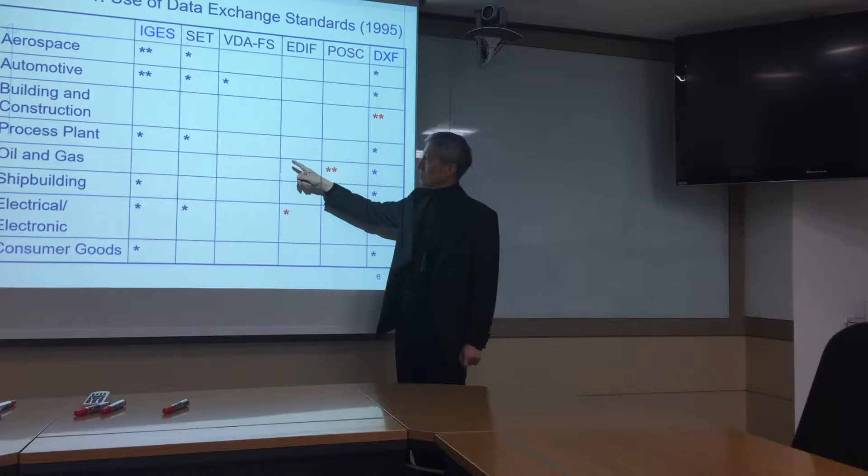EDIF is for electronics circuit drawings, and POSC was for plant industry, chemical process industry. You can see that DXF was good in building and construction industry at the time. POSC is good for oil and gas industry, as you'd expect. EDIF is for electrical and electronic industry. IGES is better for aerospace and automotive industry inside the United States.

Probably VDA-FS is from Germany, and they are strong in automotive industry. They are trying to move into a STEP world from IGES. So in STEP, the possible application is divided into the timeline of product development: design, analysis of the product, and product data management, PDM, or nowadays we can see PLM instead of PDM. This is the old name of PLM, and manufacturing itself, or machining.

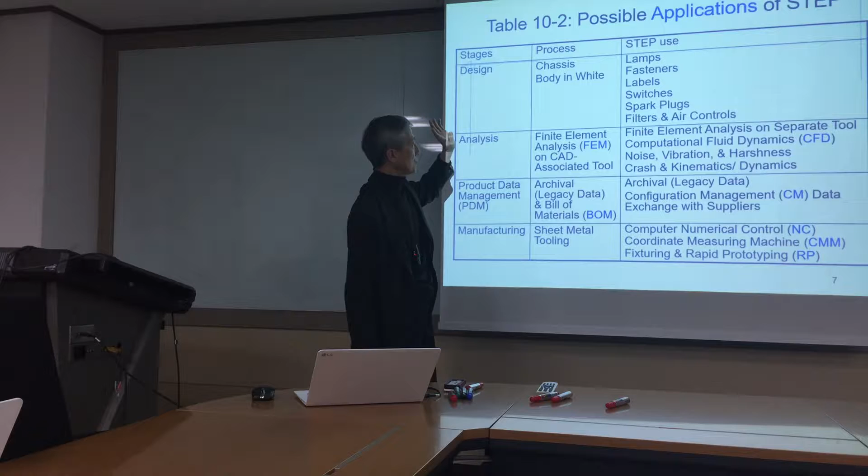If you think about more processes in design, you can see that this is for automotive industry. Chassis and body-in-white is probably for the body of the car, not the powertrain part or electronics part. Analysis may be finite element method or CFD and other things.

PDM is a database management system for engineering information, so you need archiving for long-term retention of data or legacy data, and bill of material, or BOM. Also you can think about configuration management or long-term data handling of design changes.

For 50 years of a nuclear power plant, you see that there are big changes. Say you think about your house, your home, for a long period of 10 years, things are changing inside your home. Many, especially the electric devices, are changing, and configuration also changes. So you need to manage the information changes of that product or plant, especially for safety devices of facilities such as nuclear power plants or aerospace, airplanes. It is very important to keep track of the most changes.

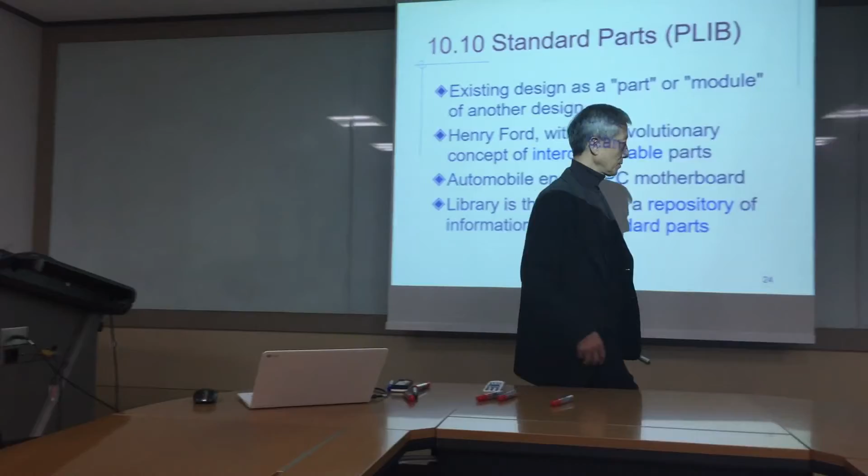Modules. So modular concept is used in many industries. Probably most of the industries are using a modular concept nowadays, including electronics too and plant industry too. Standard parts, it is also related with this component and parts, right? Rear parts, the electrical motors, and also bolts and nuts and pipe pieces and valves, pumps, right?

So existing designs regularly use many parts or modules managed by database technology. So Henry Ford, 100 years ago, used interchangeable parts of mechanical components of cars so they could make mass production, because the parts are coming from different small companies. The same bolt is designed by Ford but manufactured by other companies.

Nowadays, the same car, Volkswagen Golf, is produced inside China, inside Germany, inside Brazil too, right? The same car is produced, so interchangeable parts are manufactured and used by different portions of the company. Engine, motherboard. So we call this something like a library or catalog or database or repository, standard part or standard modules or standard components.

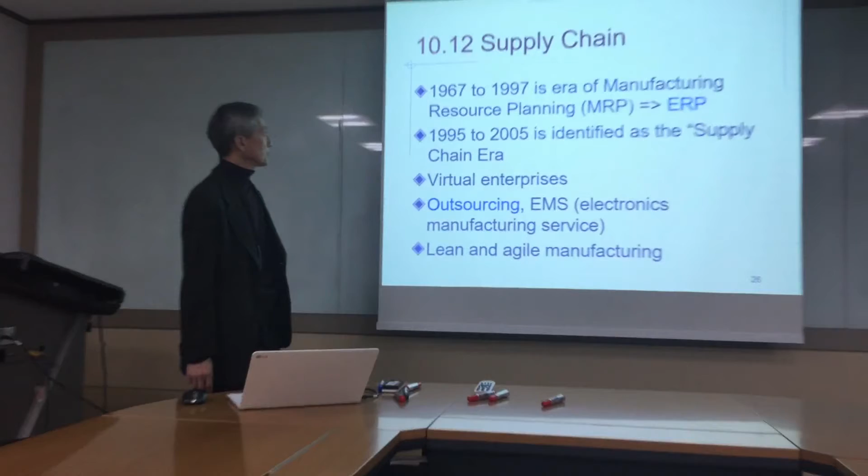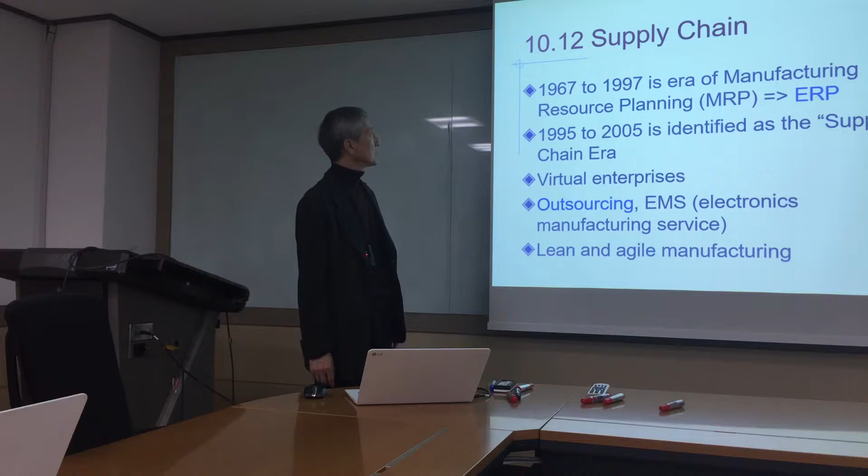Right? And supply chain was very important at that time, 10 years ago, because of outsourcing. And EMS was a popular name for outsourcing. And they were trying to do lean and agile manufacturing. Do you know what lean and agile means? The meaning of agile? Did you learn this from Professor Teshik? He is also very interested in this topic, right?

Maybe. Maybe? No, lean manufacturing is about the concept to reduce waste. Reduce wasted time, improve the efficiency of the process. It's like a philosophy more than a technique. And agile manufacturing, maybe it's related to flexible manufacturing systems, but I'm not sure.

Right. Lean means the company itself can be smaller by using more outsourcing. So the factory itself, the Ford Rouge factory, at one time was a very big site with a very big number of employees at one site, right? Now they've reduced it to only a small assembly line, right? And the number of employees is very small, right? Still they're producing more cars. So the size of the company itself is reduced through lean manufacturing.

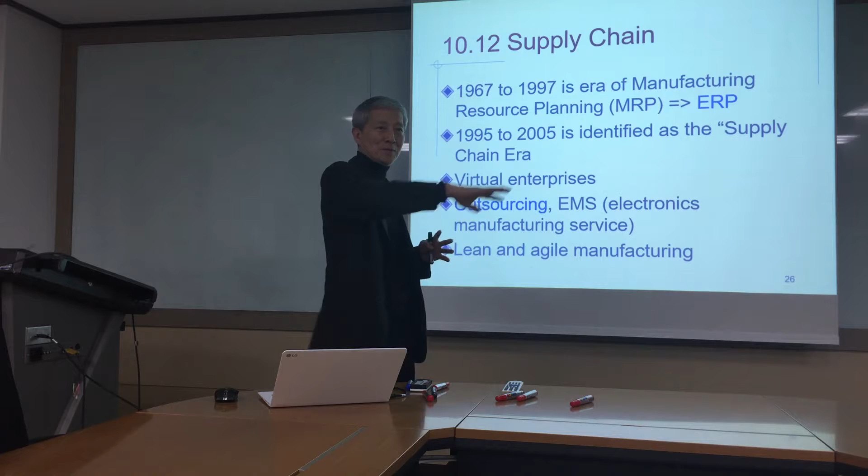So outsourcing is good for this. Outsourcing is good, right? That is another reason for outsourcing. If you want to change a Ford car model inside the Rouge factory, you should change a big amount of employment, a big amount of storage of material. But if you have only an assembly line, and the others are all outsourced, then you can change easily, right? Because you are handy size, right? Your body is very small. So because the outside world and market is changing rapidly, right?

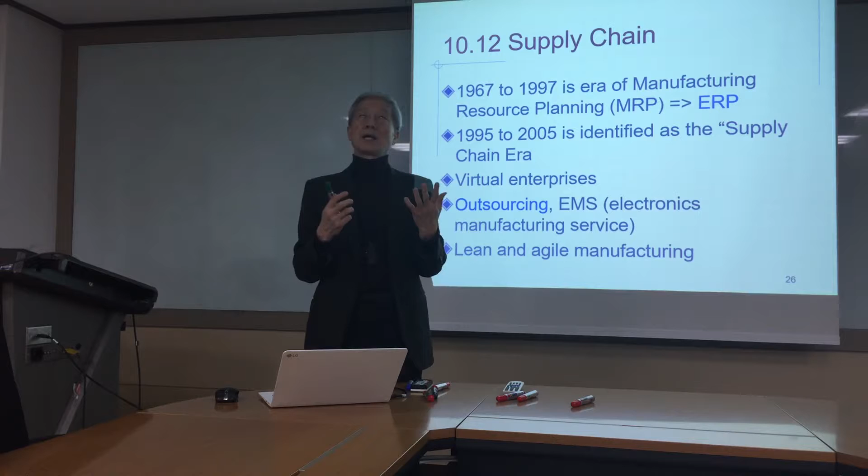Say, 10 years ago, the new car development cycle was 50 months to change to a new generation of car.

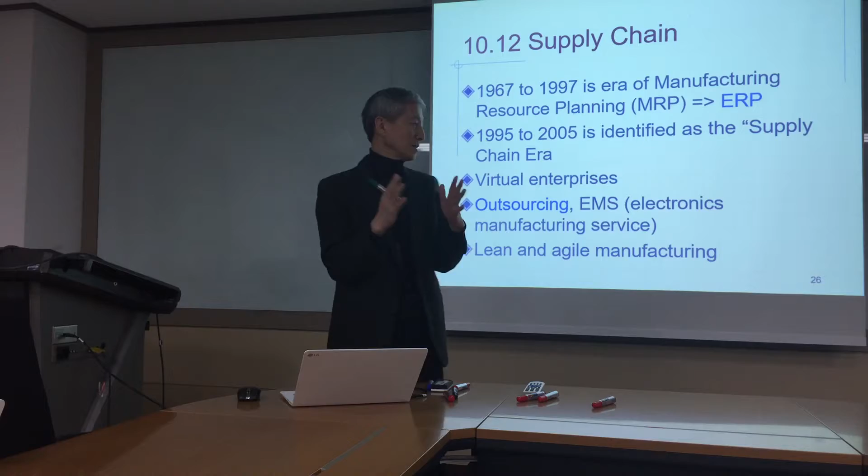Nowadays they are saying 12 months to provide a new car, because competition is heavy. Think about the smartphone, the new cycle of design and development of new versions. They are saying 6 months to market for a new smartphone design. So the timeline is reducing, and you need a more agile response to market changes.

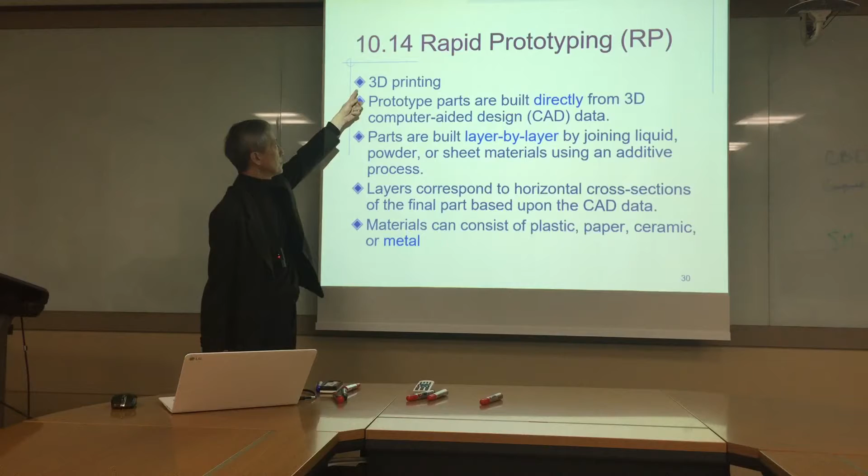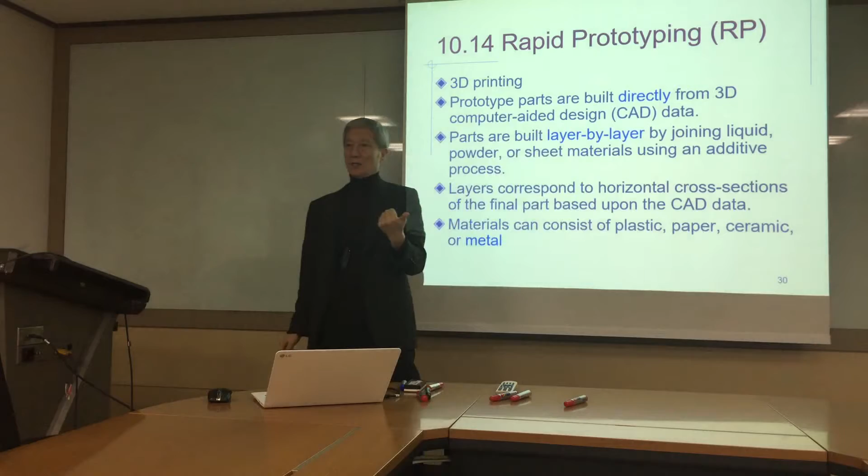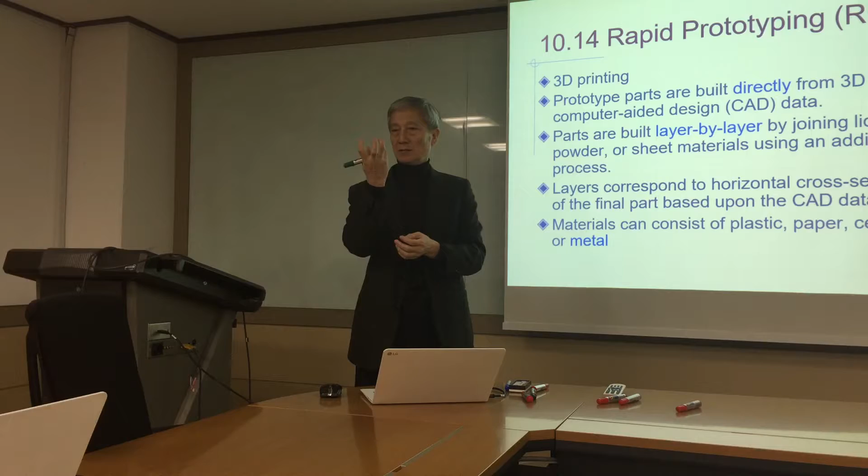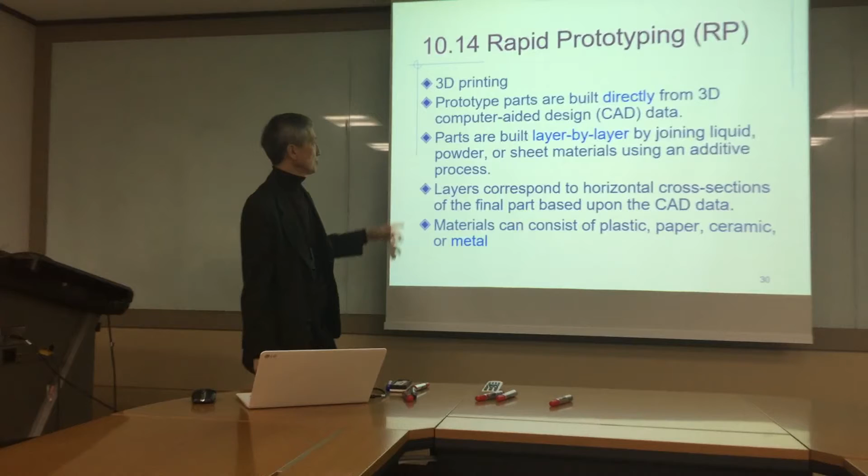Operational feedback - rapid prototyping is similar to 3D printing nowadays. They want to quickly make prototype parts directly from CAD in one day. Otherwise it can take 1 month to make one small pump, tank, or motor. But they want to make 3D printing in 1 day to test ideas quickly. In old days they used layer by layer printing of plastics, but nowadays they want metal powder printing.

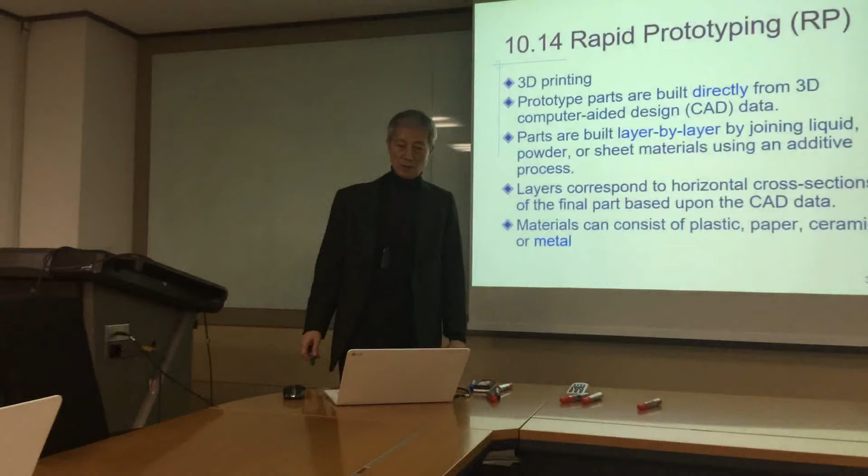Product support software, we already saw last time - software tools for Step translation, compatible libraries and databases. I explained this last week about Step Tools Software Company, EDM of Norway, Eurostep of Sweden, LKsoft of Germany, and ProStep of Germany.

And translation centers - 20 years ago, General Motors opened the Step Translation Center in Troy, Michigan. Delphi is also a subsidiary of GM, and GM Powertrain is another division. Powertrain means engine, transmission, and gear. Delco is for electronics - they also use it.

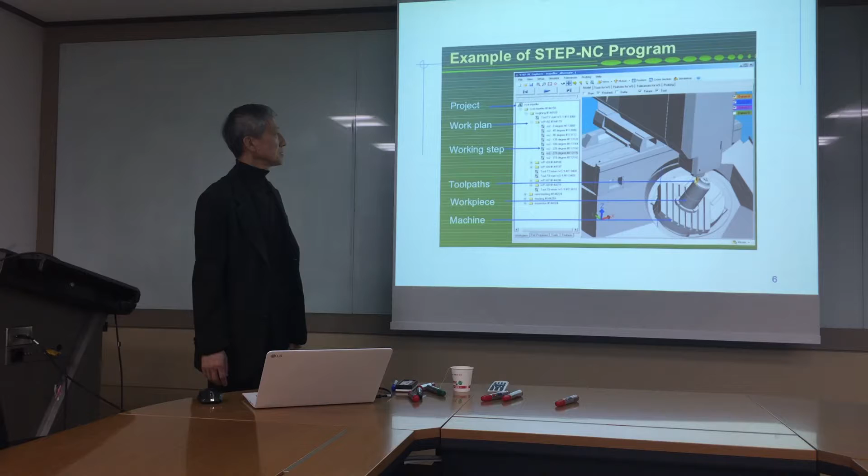And the sibling, the neighborhood of SC4 is Step NC, which is SC1. SC5 is nowadays very active because of smart manufacturing and Industry 4.0, and they are doing device-level interchange of standards. This is one slide showing Step NC - the machining itself, numerical control machines, machining centers.

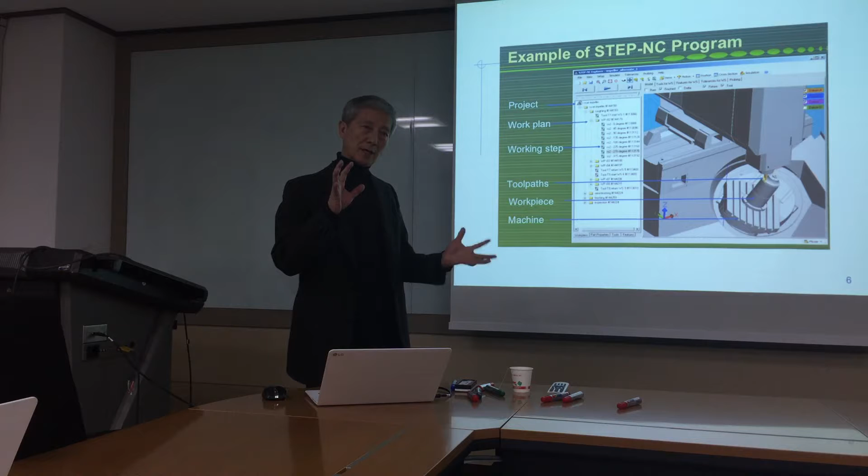So CAD and CAM in old days, and CORBA was an old name coming from the OMG consortium. They want to integrate software components, similar to CBD related to this idea. They want to integrate components coming from different vendors, so they have an idea called IDL language - IDL is something like wrapping the software component to make a very interchangeable component, making the same coatings around different software components.

Now the idea grows into web services. Web services are also a little outdated nowadays - nowadays 'app' is a very new word, the app of smartphones, with a very similar idea behind web services. And internet, e-catalog, electronic catalog, dictionaries. Before the internet explosion, which came from the World Wide Web, Step was starting before the World Wide Web, so they moved into this new technology - Java, XML too.

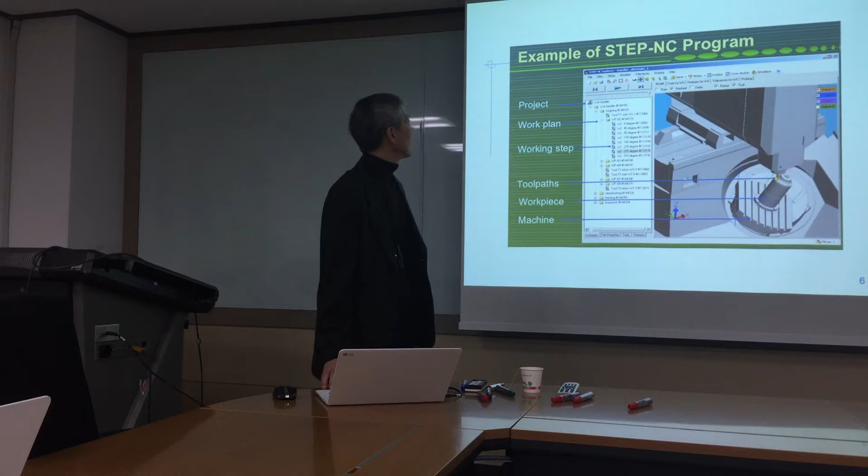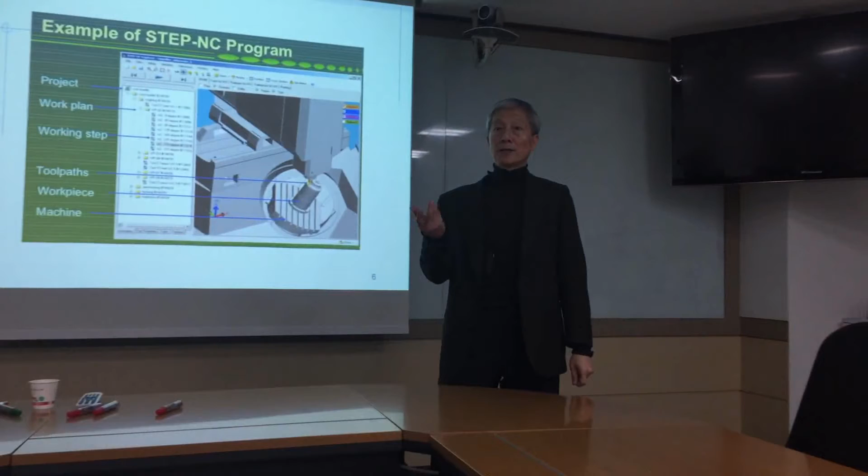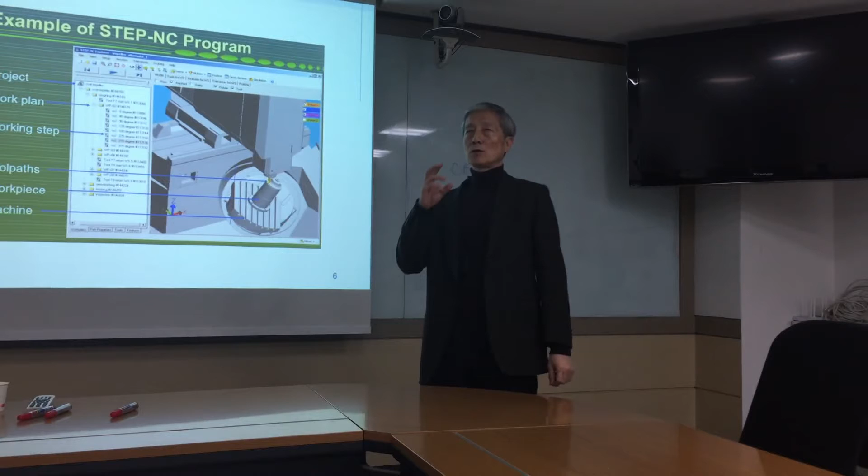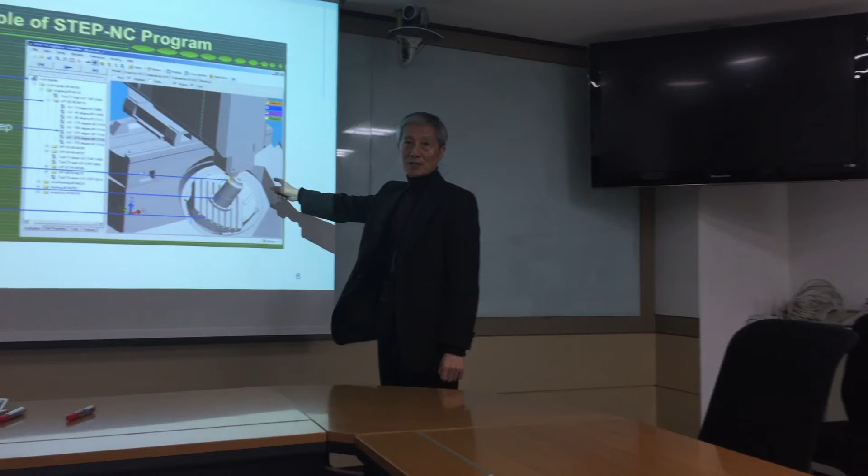What this really means? This is a software developed by STEP-NC, yes. You know about G code of NC? Right. They want to replace G code. So this is very big work, including you should change the control of the NC machine too. But the goal of them is they want to send STEP drawing, STEP file, AP203 to machining center. They want to convert the STEP design model into NC code, not G code, STEP-NC code. And you need to have a new controller handling STEP-NC commands instead of G code.

Right. G code was developed in 1960, long time ago. But it's still being used now. Yes, still. They want to replace G code with STEP-NC. Still working. Yes.

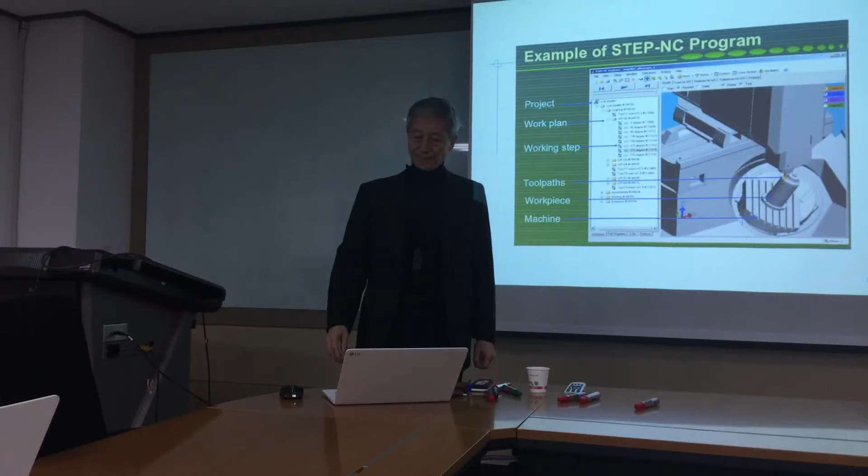CORBA, once again, is moving into web services. The same idea again. Internet and intranet catalog. Oh, okay, I already explained this. OLE was also related with CORBA. OLE is coming from the commercial world. It's coming from Microsoft. So you can think about it as the CORBA version of Microsoft or web service version of Microsoft.

And design and modeling, right? And Java is also not so new, but it was also new during the STEP development. So they had a Java binding for STEP SDAI APIs at one time. And MANDATE is for manufacturing management. Now it is refocused because of smart manufacturing and Industry 4.0. They are trying to handle manufacturing resources.

SGML, once again, I already told you many times. And VRML has also outgrown into X3D nowadays. The Web3D consortium developed it 10 years ago. It was VRML. Now changed to X3D.

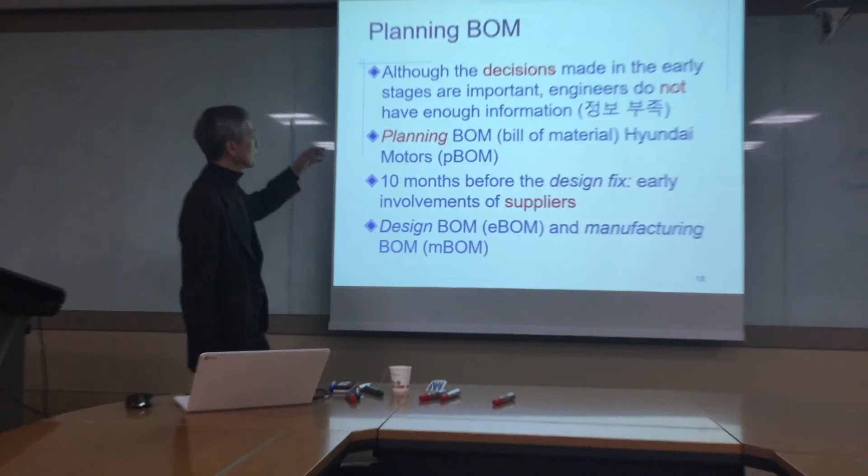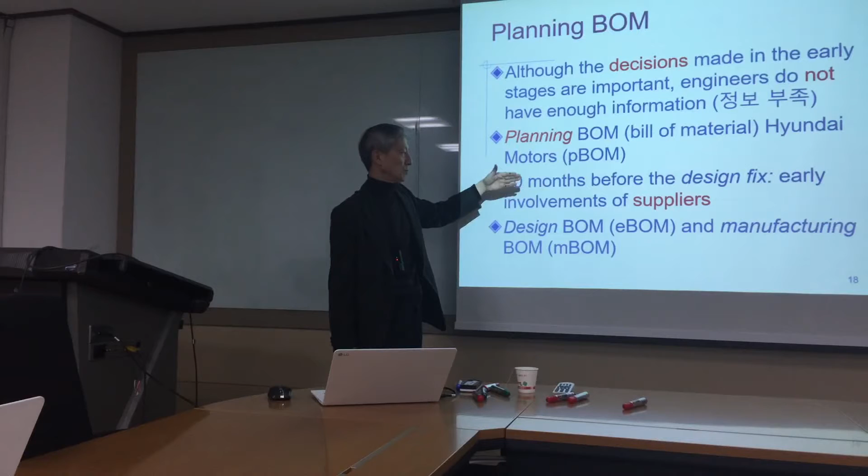And why do we need to have a standard? Already said many things, and especially outsourcing was important. And we already saw this in the beginning of our classes. Tower of Babel, we need to have a standard. And BOM, there are different versions of BOM: planning BOM, engineering BOM, and manufacturing BOM inside one company. So they want to make a unified BOM, single BOM. But this is not easy. But anyway, at each stage of the engineering process, you need to have a parts list.

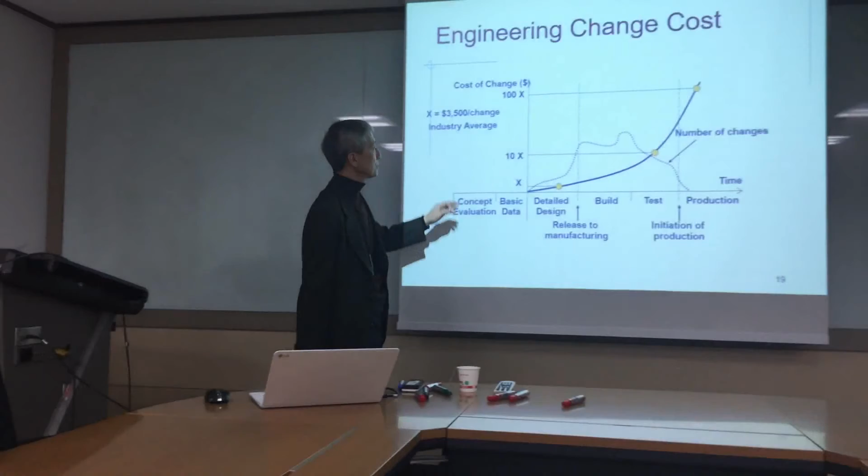Because in design changes, if you make a change in a later stage, then the cost is very high. So you need to have more review or testing or concept in the early stage. That is important. Virtual factory, information interchange, outsourcing of OEMs and component suppliers and data. And EMS, once again, we already explained this one many times, is a key word for outsourcing too.